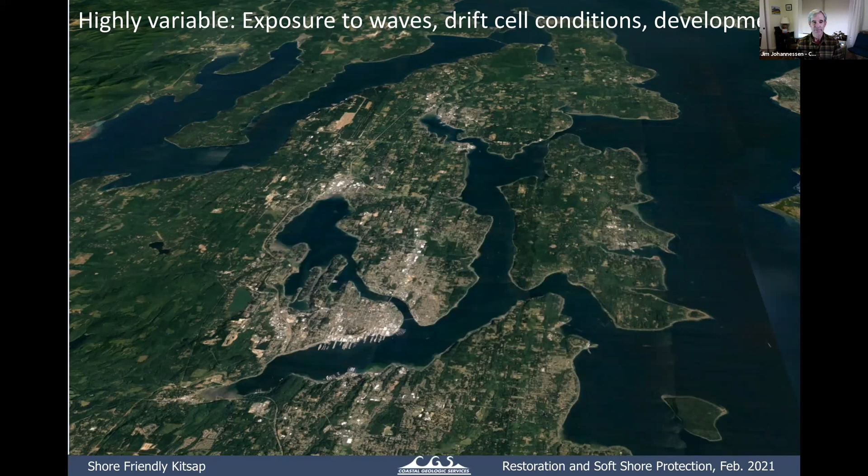And the more armor, which is bulkheads and seawalls, the less sediment is getting into the system and moving in the system, and you're more likely to have beach erosion. It's sort of a negative set of consequences the more highly developed the beach gets. And you can just look at the gray areas on the map versus the green areas, and you can see that from the airplanes and the satellites.

Like I said, Foulweather Bluff, high bluffs, erosional feeder bluffs. And then right next door, we've got these natural lagoons and spits, developed spits, protected lands, urban lands. It's all around the county. So we have to think about how do we manage them.

Well, the folks who build the bulkheads, they know how they want us to manage them, and they make a good pitch. You can see how pleasant it is sitting on top of the rockery wall with a Polynesian looking dress and a drink in hand. Call the number, they come out, they'll tell you what you want to hear. So there's been years and years of bulkhead building, generations of that.

And the shore-friendly programs came out of the need to counter the status quo from the 50s and 60s and 70s. We've greatly degraded the shoreline as a population here. We've seen salmon numbers plummet, and all of us together are trying to restore salmon, trying to stop the loss. And it turns out that shoreline hardening, shore armor, contributes to lots of habitat loss and lots of direct and indirect impacts. So that's kind of why these shore-friendly projects and the regulations have become tighter.

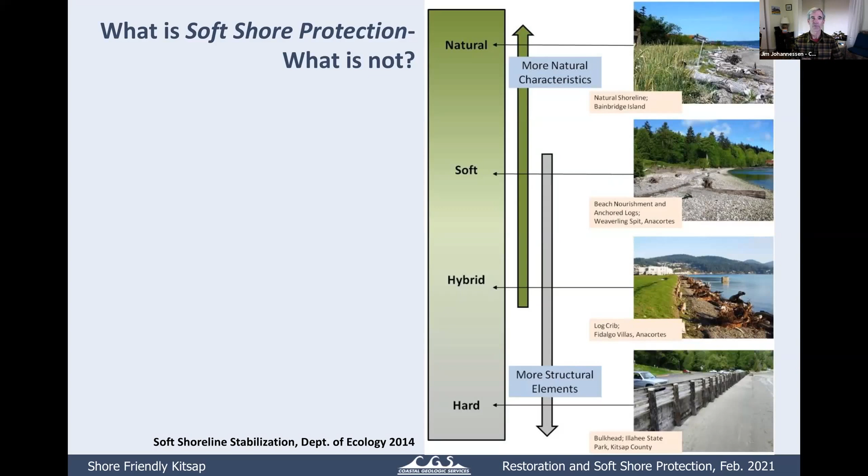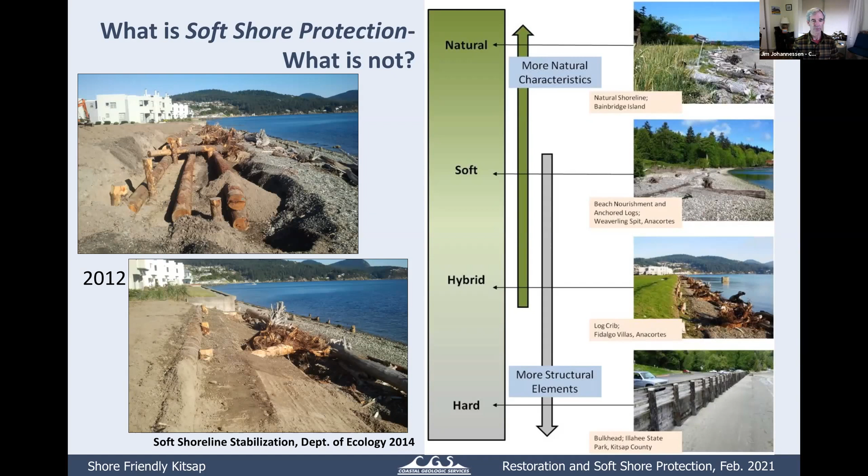The logs are firmly anchored, nothing's flexible there, but then they're filling in with gravel and cobble. So that's clearly not a soft shore protection structure, not a classic hard shore, so that's the hybrid. And there's a variety of ways that that's being done. Mostly permitted towards a hard shore structure, but maybe not as much mitigation needed.

I'm going to Hood Canal this Friday for a different enforcement site working for the federal government. So, there are more consequences, as we used to say to our kids, right, for breaking the rules these days.

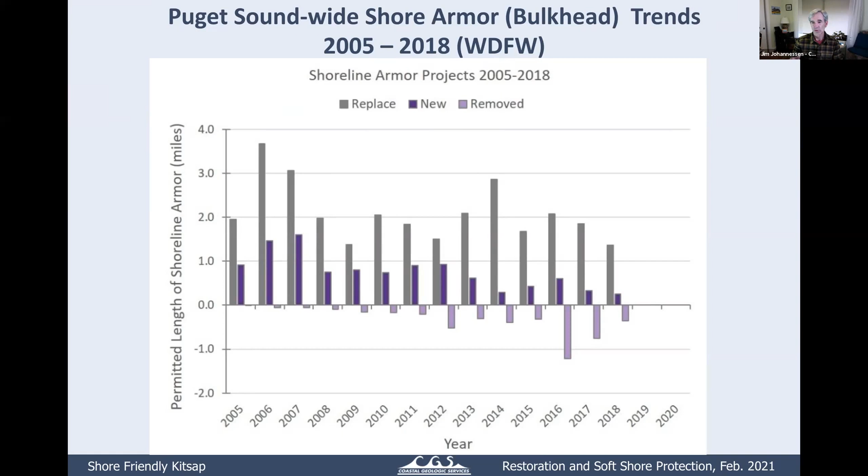I know we've had good numbers for grant-funded projects in 2019, 2020. I wasn't able to get the newest data. It's a bit of a lag from the state system. So there's been a lot of trend for bulkhead removal, and it's been going towards a net removal overall, even though this graph doesn't quite show that.

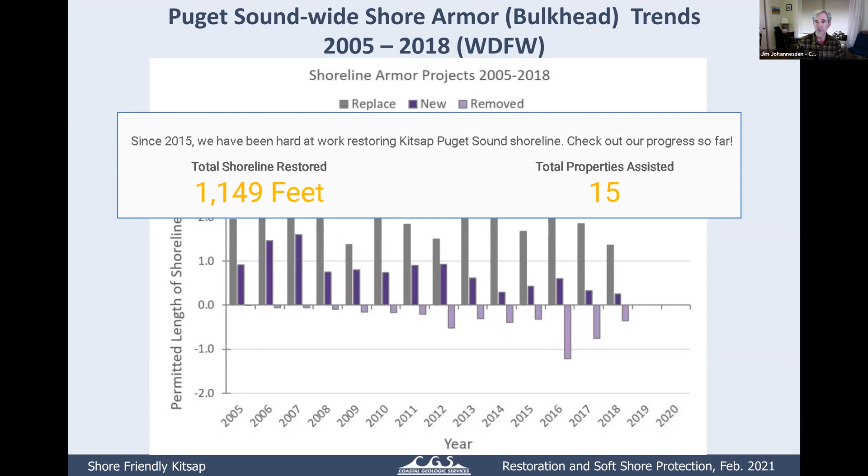In Kitsap County, this is from the Shore-Friendly Kitsap website, Christina and crew have been orchestrating and helping to assist a total of 15 projects with some grant funds and site visits to many more properties, but 15 have had some form of removals of armor for over 1,100 feet of shoreline. And you could talk to Christina about more opportunities there.

So the Marine Shoreline Design Guidelines, I introduced this quickly a week ago, MSDG for those of us in the know. It goes through how to understand these shores, what are the issues, how to figure out what the problems are for causing erosion. And then it goes through a variety of management techniques.

These are the basic management techniques, starting with full restoration. Bulkhead removal is one specific action, along with other structure removal. Then there are passive techniques, like vegetation management, staying away from problems, drainage management, avoiding clearing in the wrong places, and relocating homes or other structures back from an eroding shore or bluff.

Soft shore protection includes beach nourishment, which means adding material to the beach. Think of it simply as nourishing the beach with sediment as the food. Gravel is the common protein and carbohydrate, and you throw in a little sand and vegetation for the beach to grow in. Large wood is also used, but at a more restricted set of sites.

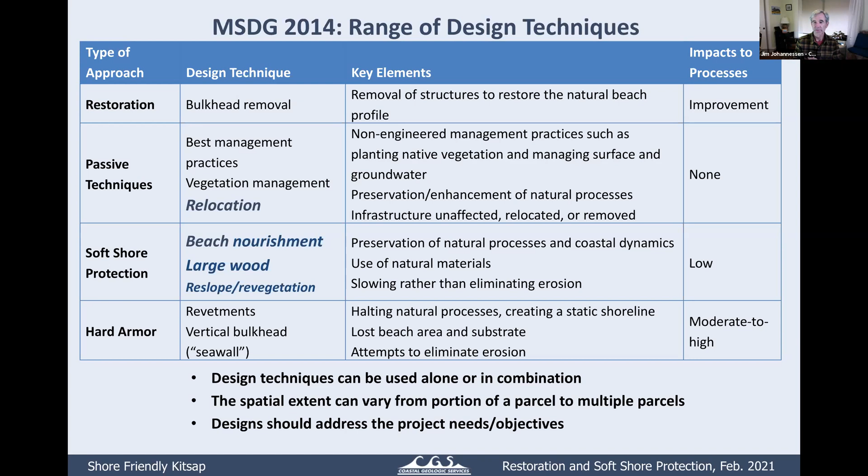The various soft shore techniques and vegetation passive techniques can be used together or in combination. The spatial extent varies—it can be one parcel or many. You can have more options with longer shoreline stretches, particularly for beach nourishment. The designs need to address site-specific needs, characteristics, and objectives.

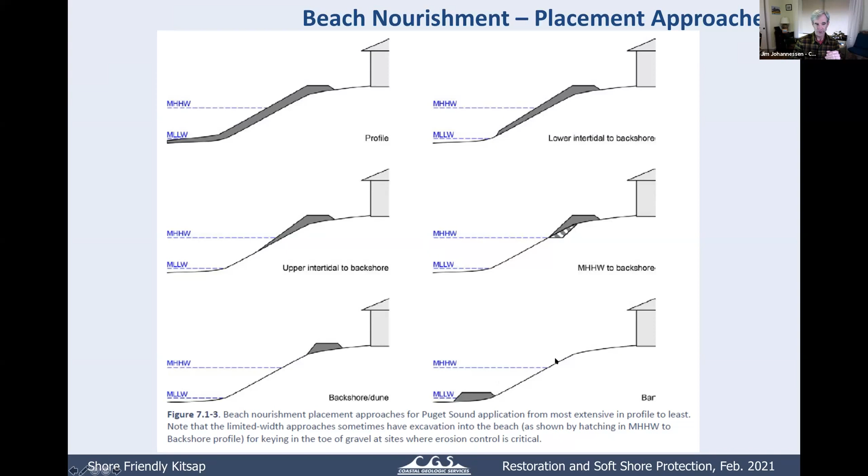Lower to moderate wave energy sites are more favorable than high energy. But again, if the waves are coming head on, then the high energy sites can work quite well. Like a pocket beach is usually oriented towards the largest wave between a couple of headlands. We don't want to do this at high erosional rates or places where houses are very close and the risk is high.

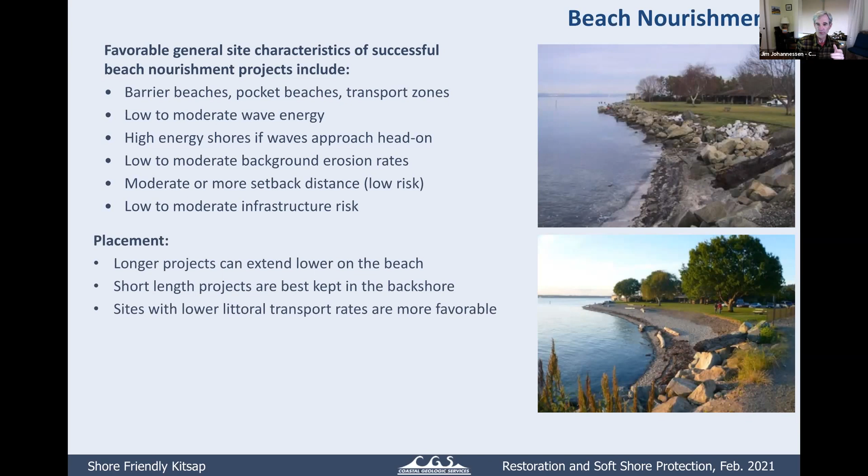It's not as permanent as a bulkhead, so we have to be upfront about that. In terms of placement, longer projects can extend lower on the beach, and you've got more options with longer projects; more places are suitable. So again, short projects are best kept up high. Sites with lower littoral or net shore drift rates are more favorable.

And moving on to large wood, or drift logs, call it what you want. These are examples of built projects, again, from the design guidelines. I'll show you the upper two projects in more detail. The one on the left had large anchored logs parallel to shore. The one on the right had some logs put up at angles to catch other wood. This is in a high drift wood area.

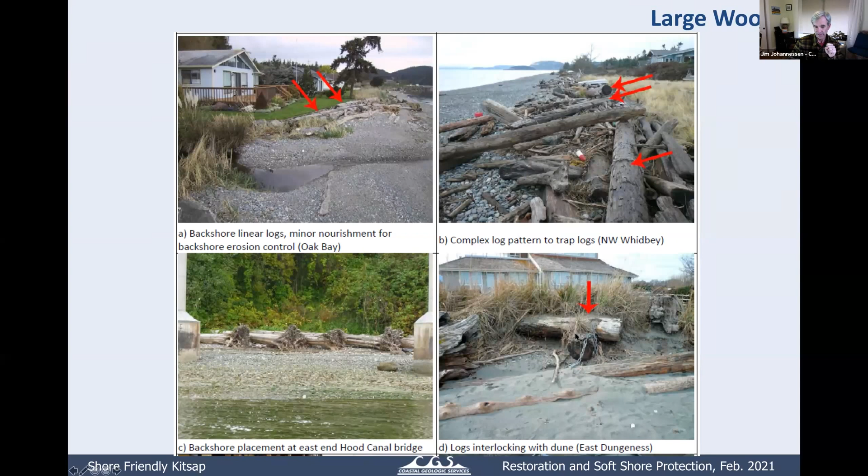This one is under the Hood Canal Bridge, done by others, and this is a pretty brute force approach with large cedar anchored. Then here's another one on the right with some interlocking logs within a larger berm. When the logs are buried, they tend to rot a little faster - that's the only problem with that approach. So selection of wood is important too.

So favorable sites for large wood would be, again, the no-bank sites, the barrier beaches, pocket beaches, and then transport zones, which are the more neutral shorelines with slow erosion, low to moderate background erosion rates and wave energy. Again, not the highest risk sites - the design guidelines has a way to look through and assess risk through some different characteristics. And then you need to have a little bit of room. That's why the no-bank sites are best.

For placement, usually placed higher on the beach where natural logs occur. There's been a couple projects that other folks have done where they're anchored quite low on the beach, and they haven't done quite as well. This one on the right, I haven't really studied this much - I believe this is in Kitsap Memorial Park, down where you guys are. I don't know that there's much data on that. But if it's placed too low, it can get scour underneath the logs in particular, and the anchors take a lot of force in the chains and whatever else you're using.

So really, the design guidelines recommend they're not installed below the high tide line. There's an example right there that's different.

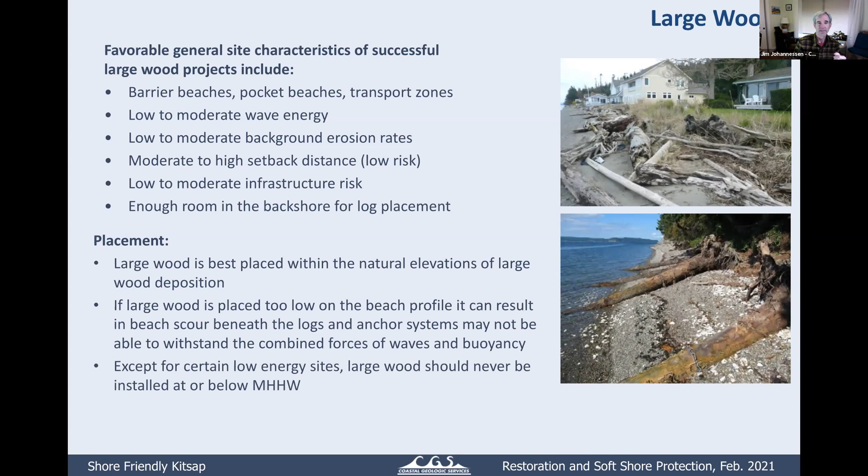I'm not going to run through this whole table, but there's a table and a flow chart in the design guidelines, and they get at - beach nourishment, large wood, relocation, hard armor, reslope reveg, the bank revegetation - those are the abbreviations.

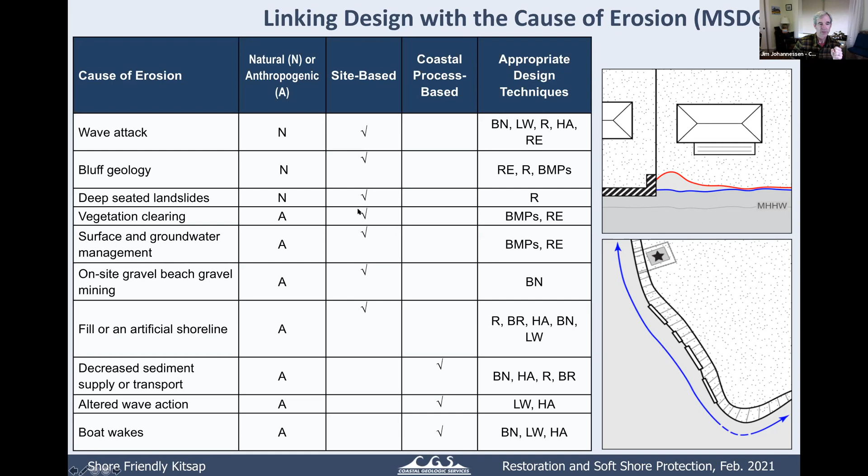So these are the tools out there, and I'm going to keep moving. The design guidelines also has a large case study appendix, so you've got 25 case studies, and maybe one of them is much like your place. It's all online, and you'll get the link from Angie and Christina.

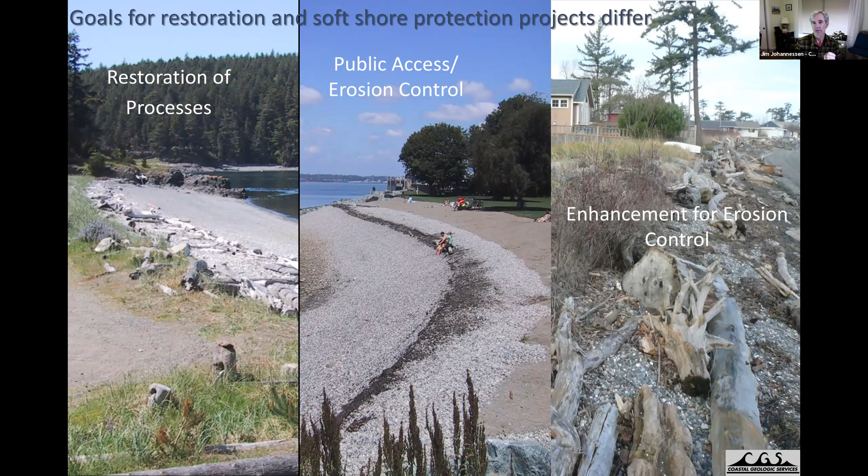So goals for projects differ. We might have a pure restoration project on the left, an enhancement, habitat and recreation project in the middle, or a single family erosion control on the right using soft shore. So the goals will help dictate the approaches and the needs. So a few bulkhead removal case studies and more restoration-oriented projects that I've designed and my team has designed over the years.

This is the Powel site down on Bainbridge Island, on Bainbridge Island, Port Madison, Bainbridge Island. Of course, in this area here, so it's a point that faces down into Port Madison, relatively low energy. The drift cell ends here. The sediment transport along the beach kind of peters out in this area.

Bainbridge Island Land Trust got some grants 10 years ago, 12 years ago, for 1,500 feet of shore on this large property. Most of it was armored many, many decades ago. We did the engineering and design and construction oversight. We had Northwest Ecological Services doing a revegetation plan.

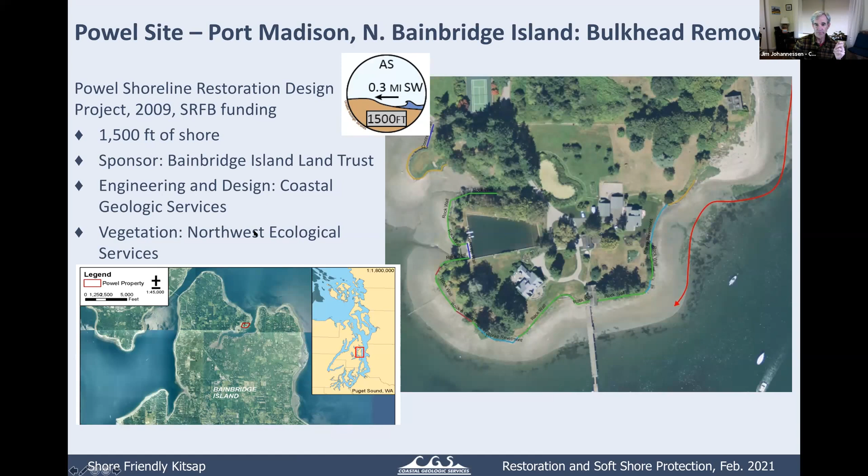Some of the before on the left, we had falling down creosoted walls, creosoted wood, rock walls. We had concrete mortar walls. So we had access by barge and loading out all the debris by barge. We had a cultural site in this area, a big shell midden that the tribes were concerned not be damaged. And then we removed the armor. We didn't do a whole lot of bank regrading. We transplanted the pickleweed, the salt marsh, and then cleared out invasives and started to plant.

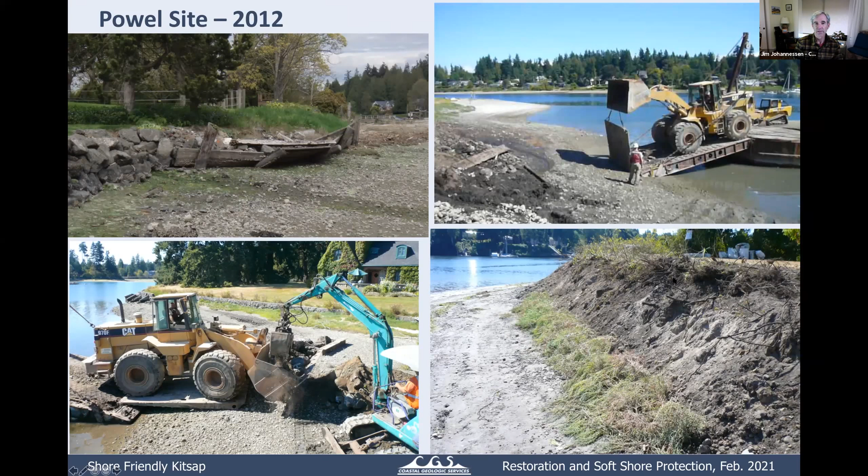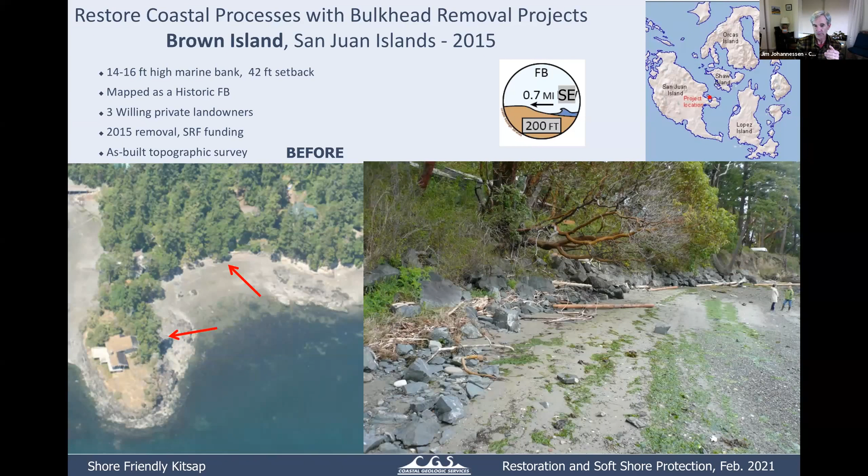It was here, but we had a fairly small wave energy, slow erosion rate. And the owner here was very happy to try to naturalize the shore. She's very interested in salmon restoration and getting more room to walk on the beach as well. This makes more room for forage fish to spawn on these upper beaches, makes room for vegetation to regrow. The litter falls, the bugs fall, the adult salmon actually eat large insects coming out of trees. We know because we've looked in their stomachs.

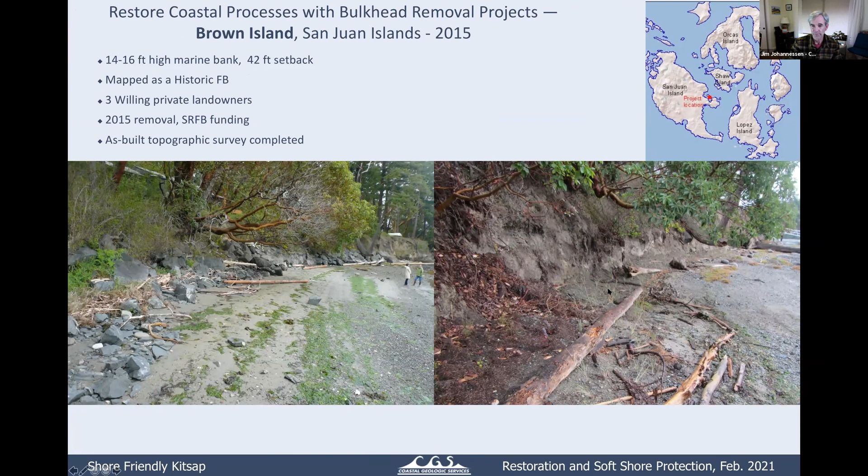So this is the before on the left, immediately after on the right. So it still looks a little raw, and then the dune grass plantings just popped in the ground the day before this photo was taken. Come back a couple years later, and the backshore vegetation has all come in on its own. The dune grass has spread naturally and through the planting. No extra bank erosion. And here's the owner once again explaining things to some other folks.

Here's another before from San Juan County, on Orcas Island. This site has a little more fetch, but only 1 mile from the northeast and east. It's a no appreciable drift shoreline, a little pocket beach surrounded by bedrock, 110 feet long. There's a dripping, oily, creosoted wood wall up here, with some fill behind it and a rock armored slope extending out over the beautiful beach.

The owners changed hands, and the new, younger owners had some interest in restoration. They started cleaning out some of the creosote from the dock and upgrading that, and they wanted to restore this area as well and free up some of the beach.

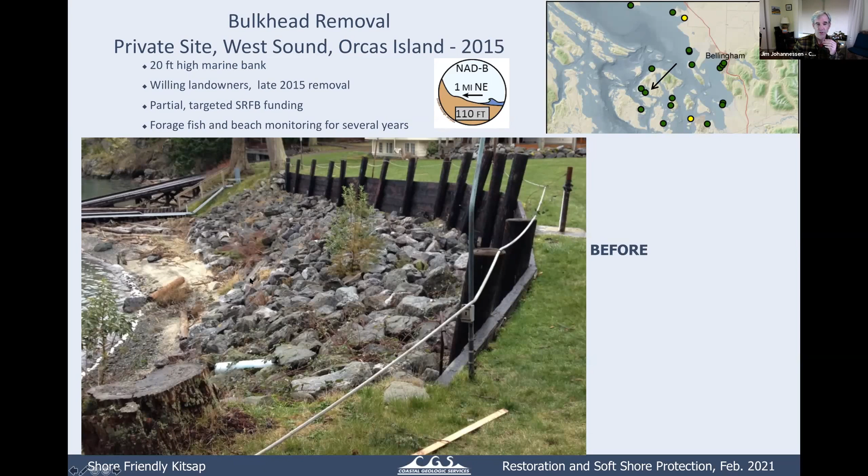So sure enough, we pulled that wall out. The contractor removed all the rock, and we actually graded it back a little bit to get ahead of the erosion that sea level rise is going to cause, as well as the catch-up erosion that would have occurred after it being bulkheaded for 60 years with no change.

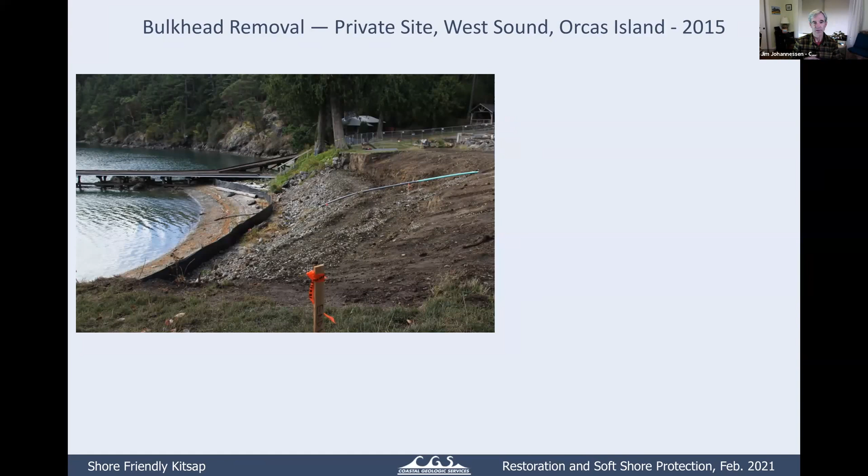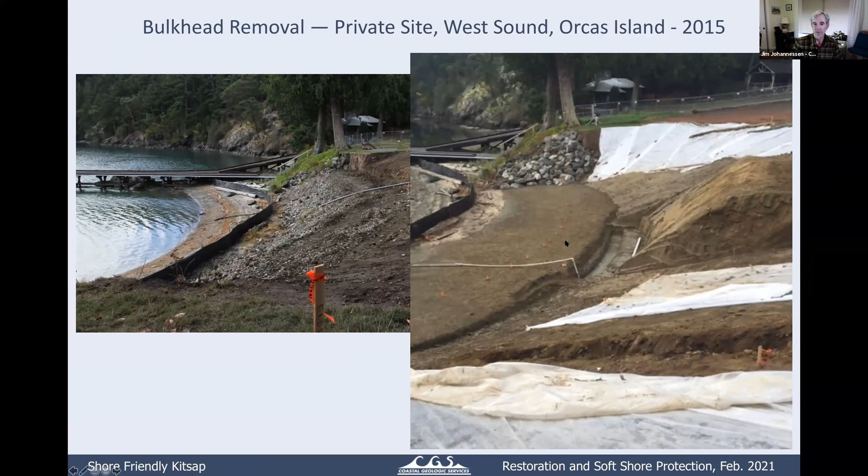You can see it was actually benched back in sections. A little bit of drainage control had to go back in that was already there before we came. Some rock was moved to protect these giant cedars, and we're getting a wider, higher beach here. That's the finished product.

Dune grass planting and other native vegetation were just going in in 2016, with new steps set further back. The owners have been very happy, and there's been forage fish spawning occurring here after the fact, confirmed with some monitoring.

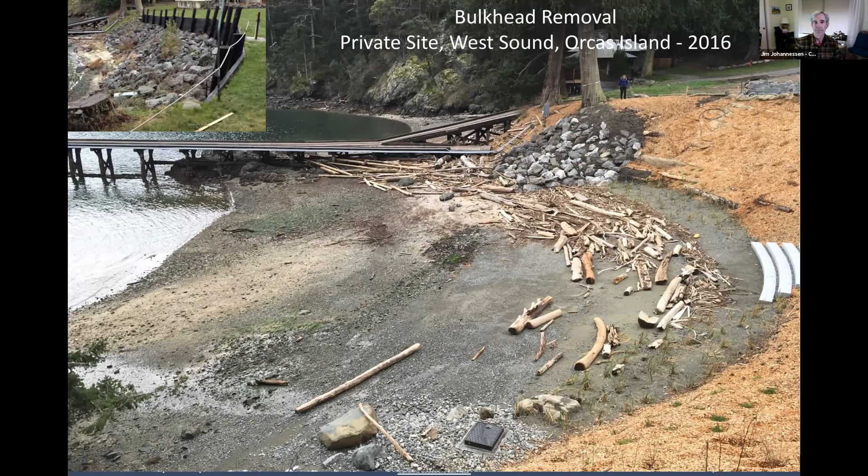So that's a single family project—a little bit larger, but still a singly owned parcel. They actually took the house down and built a new one further back as well.

Here's a small site way down in Mason County, Arcadia Point. This is an older house, probably from the 40s or 50s. They had a private little boat basin, which was a really odd spot—full of water, as you can see, because the beach came up on its own around the concrete walls.

This is a known fish trap. The tide would come in, salmon would go in there perhaps, the tide would go out, it would turn into a warm pool, and the fish would die. So when the Squaxin Island tribe bought this, they wanted that thing gone.

It was not usable—there's a spit and a bar in here. They were hoping to take this bulkhead out, but then it was determined through our investigation that there's a septic drain field right here, so that couldn't be taken out at the time.

However, the private boat ramp, they had no use for it. That was removed because there's a much larger, much better public boat ramp right here, and the tribe actually does use that—they always have.

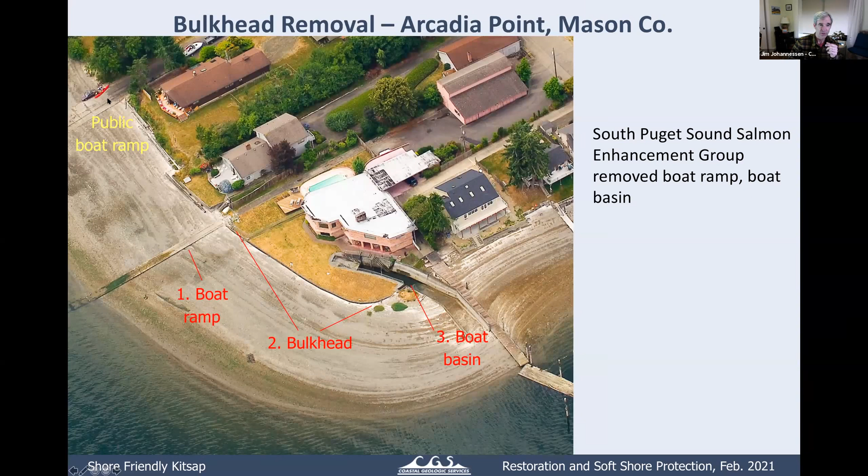So the before shows that fish trap basin to nowhere. After removal, we filled that in with the concrete to save some money, then filled it in with soil and put a little gravel sand mix over the top. Pretty straightforward project.

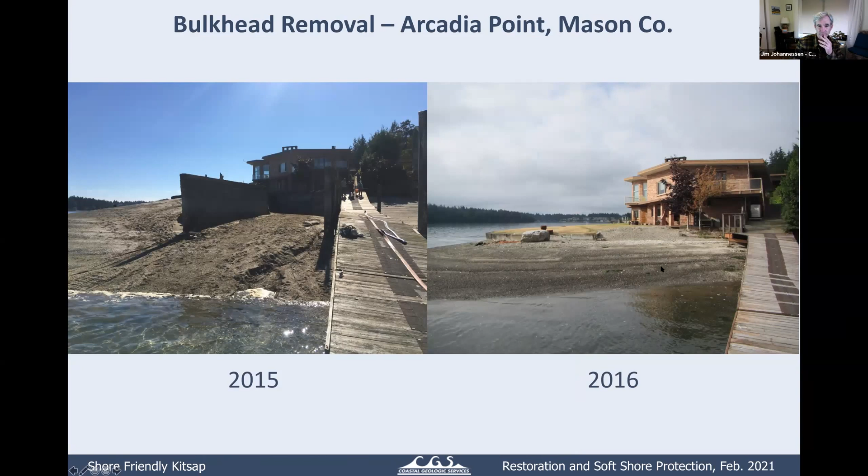Moving on to another one—this is a private community up in San Juan County on Blakely Island, in eastern San Juan County. It's got about a 10-mile fetch from the northeast, which is sometimes the big breeze from Canada, so it can get pummeled at times.

When I presented it to the community, an old guy spoke up and said, well, how much gravel do you want to add out there? We said about 1,800 cubic yards, about 18 dump truck loads. He said, that's about what I hauled off that beach in the 1960s—I was driving truck, hauling gravel to the airfield, and I took it out. He was just driving truck, just following orders.

So gravel mining was a big problem around here until fairly recently. A lot of our beaches were mined for construction and all kinds of things. We've got pictures of horse-drawn carts carrying gravel and sand off of beaches around here. It's a worldwide problem, and it's underappreciated.

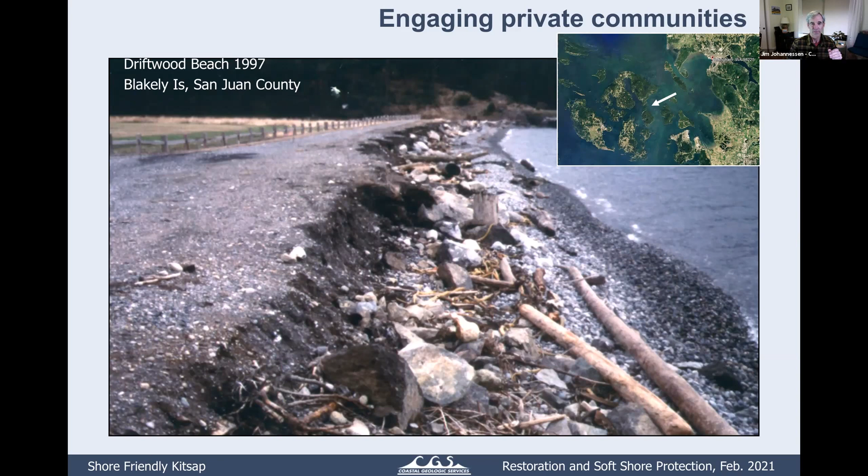So we brought in gravel and a lesser amount of sand. We pulled that road back and out. We tried to avoid the high power cable that was feeding all of San Juan County, or at least half of it, with energy here from Bonneville Dam. When we asked the provider to bury the cable because the beach had eroded some, the service provider said no, but you don't want to hit it, especially with your steel barge. So we managed to avoid that.

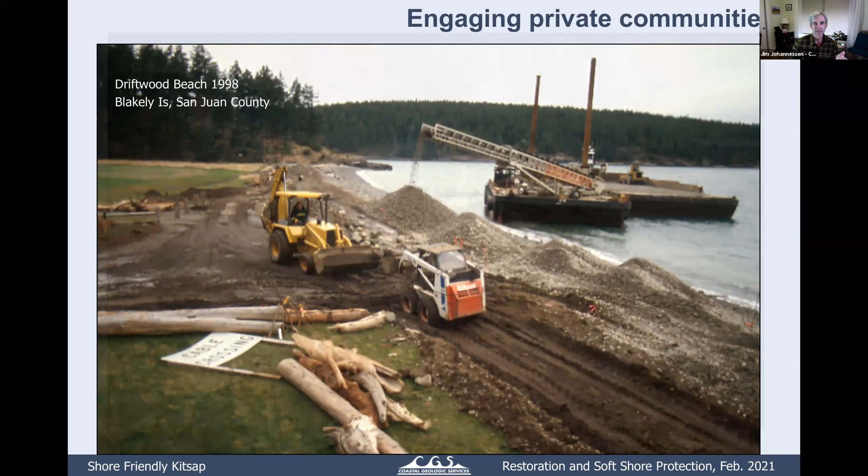So that's during construction. Obviously, this is 1998. Two years later, we had, actually in early 99, we were finishing it. Yeah, that should have been 1999, that last one.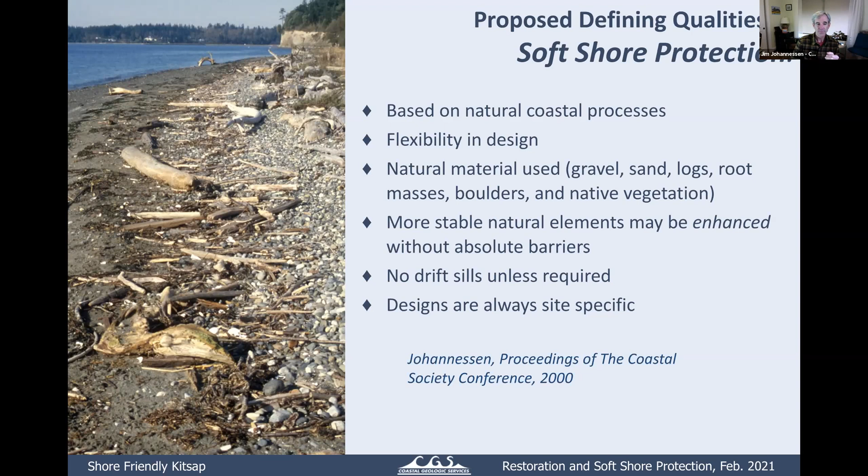Here's a private example of a group of homeowners. Like I said, a longer shoreline makes a better, more flexible, versatile longevity as well. So this was about a dozen houses and cabins on North Samish Island here. It's got actually a fairly large fetch from the Strait of Georgia that makes its way inside here in the Bellingham Bay for 10 miles.

So that when the north winds blow, this site gets hit really hard. You can see the bulkheads were falling down and the overwash was right up by the houses. We considered moving some of these houses back, but there was nowhere to go. There's a bank behind them.

And in fact, there had been a landslide that touched somebody's back door at one point years ago. So no options to move back. These blocks were just rearranged in a line temporarily. They didn't fall down in a straight line. But this is 98. Again, it was a bad year.

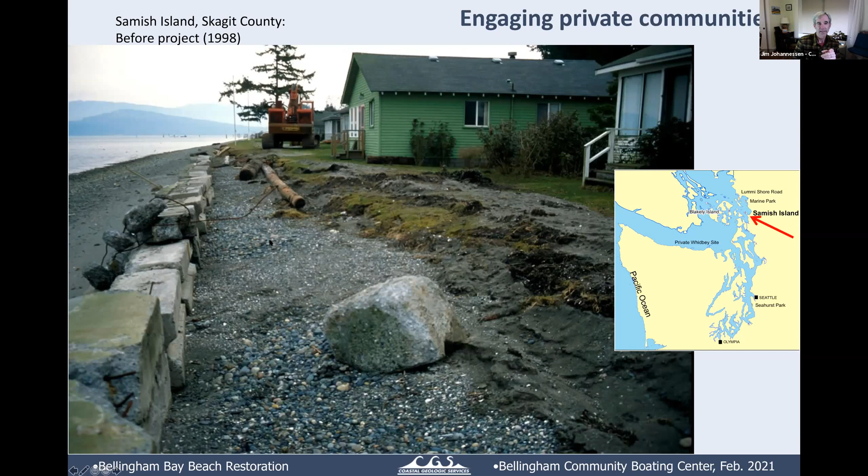This is a highly impacted drift cell. So the drift cell is from west to east. And where the feeder bluffs are on the west, it's about 80% armored and bulkheaded. So the big sediment source, there's no river here. I mean, there's Samish River, but it spits out silt and clay, and it doesn't come to this beach so much. The bluffs are all armored, so the sediment is not getting down the beach.

And what little natural sediment there is blocked by some of these big groins and fill areas. The project site is at the beginning of this large spit, which is usually, if a spit's going to erode, it's going to erode first and most at the base or the beginning, the neck.

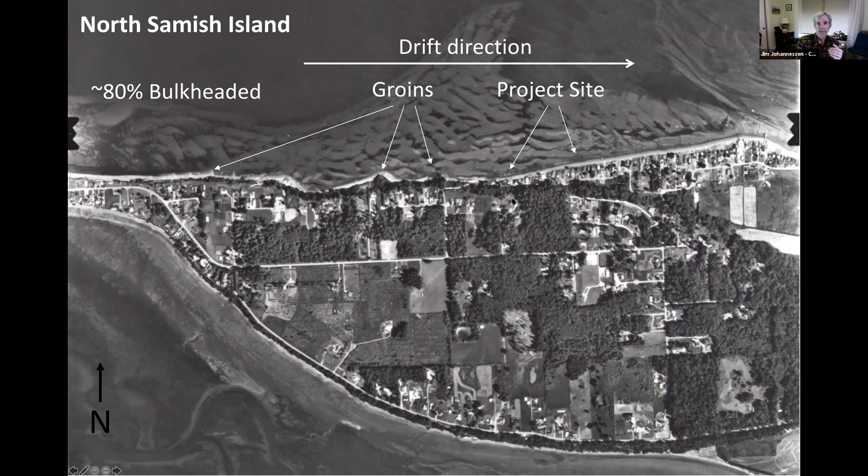So, like I said, here's these houses. The northerly storms were pounding into the walls, putting a lot of water over the top, and some of the walls are starting to collapse. So these people had been there for 3 generations.

They said, we really don't want to rebuild these bulkheads. We want you to come up with something more natural, because we remember the beach as kids. It used to be a lot higher, a lot nicer, a lot sandier, and we want to go back to that as much as possible.

This was a surf smelt spawning beach as well, so there's some constraints on what we could do. They spawned right around where these blocks are stacked, so we're looking to augment the beach if possible and not just build big walls. So we brought in lots of gravel, and we put a very fine gravel layer on top. This was brought in by barge.

This boy on the bulkhead has graduated college a few years ago, so we know it's quite a while back. We put a coarser gravel here, we graded it, put a finer gravel on top, and a little bit of sand in the back shore. This is sort of the end of the project.

And this is a few years after nourishment. The dune grass is starting to come in. That's that same green house in the middle that you saw, the broken down wall. Big wide beach, there's been zero maintenance since it went in. Surf smelt spawning has recommenced.

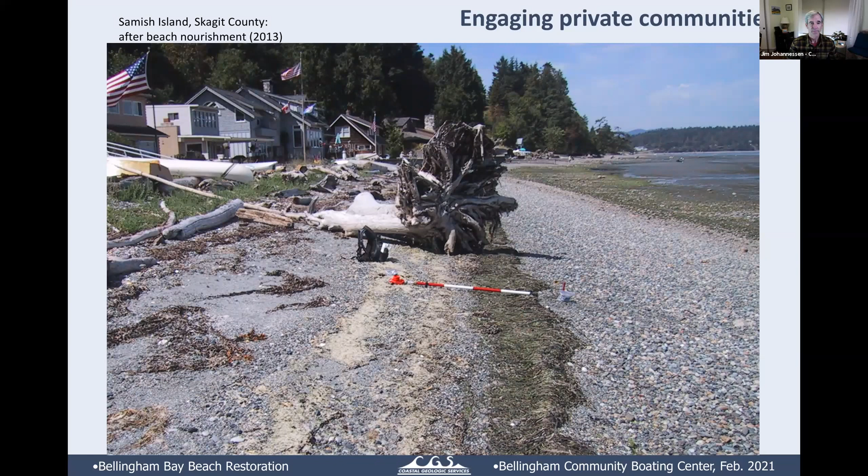And by 2013, you can see a fine summer day, the vegetation's come in, more wood has come on its own. There is one drift sill on the far end of this project to slow down littoral transport, a rock structure. 2013, yeah, it's kind of a repeat.

Okay, here's a Kitsap County project. This was one that got a little bit of assistance through the Shore Friendly program. And this was a frosty day, that's why it looks so gray, a couple winters ago. And you can see maybe in the middle, the concrete bulkhead is starting to fall down. It's cracked in several places. It's leaning out. There's more cracks along the way.

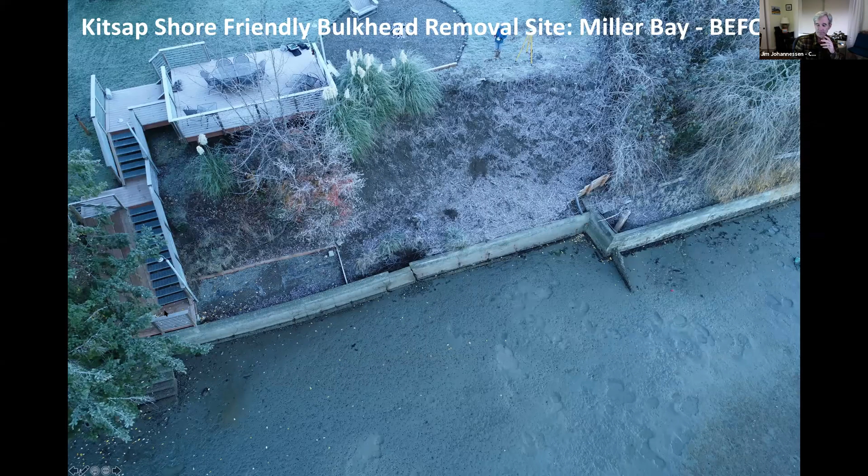One of the constraints was this little deck fairly close. But all of this structure was taken out. And there was a little bit of structure repaired and replaced near this giant tree and near the stairway. Here's the on the ground before pictures. So you can see the walls literally just about ready to fall down, and the erosion is getting behind it.

And then they had this nasty Japanese knotweed, highly invasive exotic species they were eager to get rid of. So part of the project actually scraped all that out, took the roots and soil away. And here's the beginning of the project. So they got a little bit of financial assistance through the mini grant to do part of this project. And we can see the wall starting to come down and be removed. See, the beach was pretty mucky at this point.

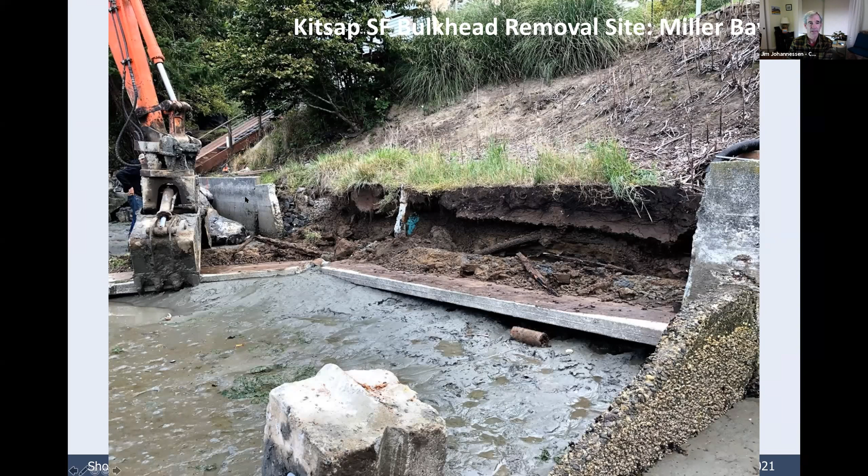It's got an articulated bucket so we could move around, get everything out of there. Other angle is when we're starting to get an anchored log in there. It's got some anchors buried down below grade. You can see we pulled back some feet here, and then this wall is coming out next.

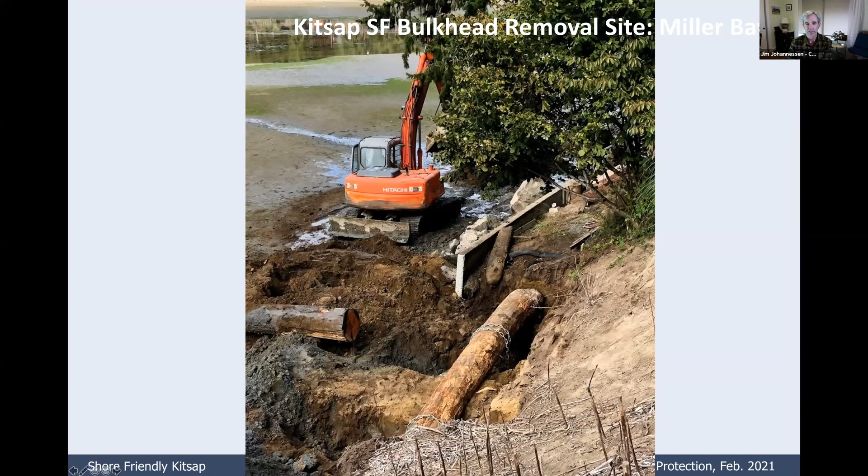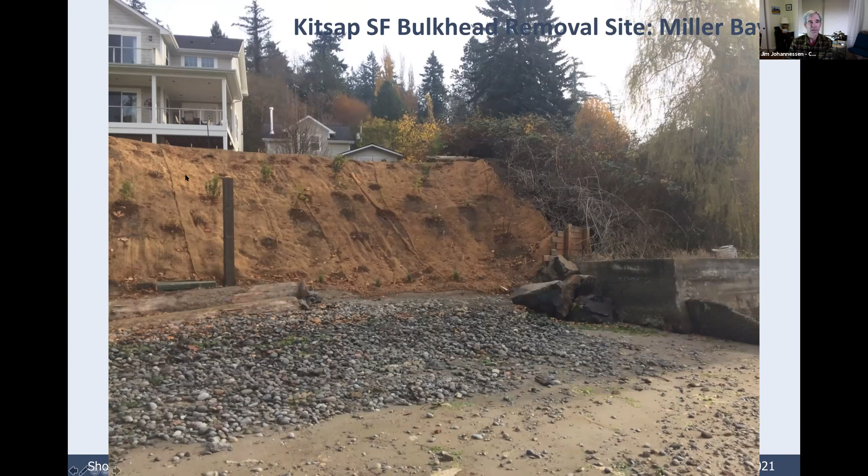So that's all been removed. There's two logs anchored in and some coarse gravel brought down. And then the exotic species removed and some jute fabric, and planting has just occurred. This is right after the project. And then the house up here, the deck is just off on that left edge as well. And same project here. I guess this is right before planting.

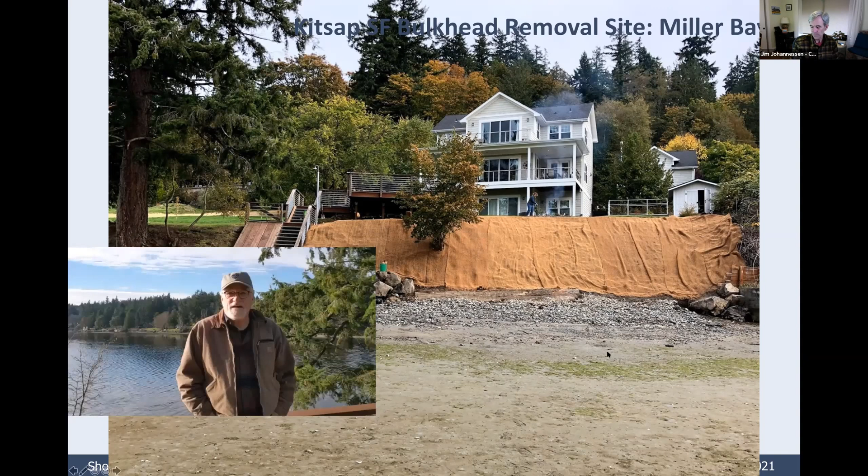Let's see if this video works of one of the owners. You might have to turn your volume up. Volume up. Let me start that over again. We couldn't get the volume any louder. Volume up. Okay, hopefully folks can hear that. I've only got one more video like that. Angie, step in if you just couldn't get it loud enough. It was pretty quiet. Yeah, I caught most of it, I think. Okay, well, maybe we'll try the other.

So just another view here. Kayaking was really big for these folks. So they've got a nice little kayak rack in there, and the beach is naturalizing. This is just a few weeks ago this photo was taken, and the dune grass is there, just a little bit of it. This deck was a bit of a constraint. It would be nice if we were able to move that back, but anyway, we worked with it.

So let me try this last video like this again. Okay. Oh.

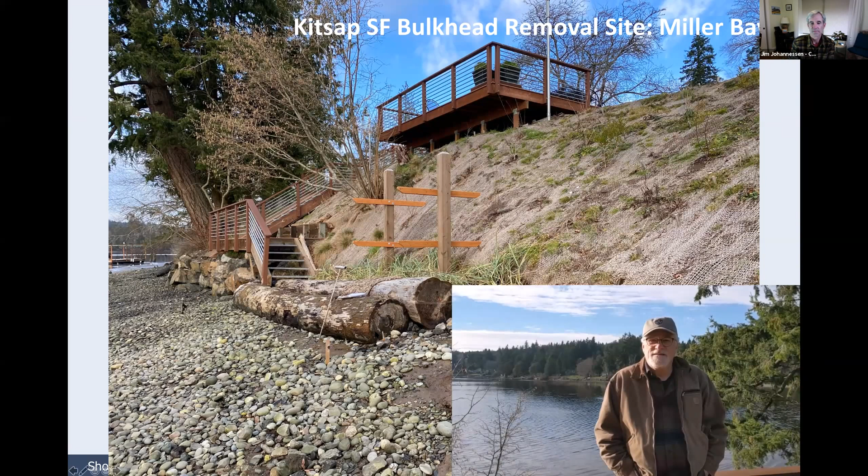Hey, Jim, do you mind if I interject just real quick? Sure. There were just a couple people, they couldn't quite hear the costs in the video. They were hoping that they could hear that or you could summarize that for them. Is that okay? Yes, that last project, that one ended up being more expensive than the owner hoped for. I think he might have said. I couldn't even hear that playback this time because I'm keeping it down.

That project was really tough because you couldn't come in by water. It was too shallow. And it was hard to get down the bank, and it was a long haul from the hill to get all the way over there. So it was a lot of handling of material, really lousy access. I think his total costs for everything were around $70,000. Typically, these projects are more like $25,000 to $40,000 when the access is pretty good. So it's not cheap, but like I said, his was really expensive because of that.

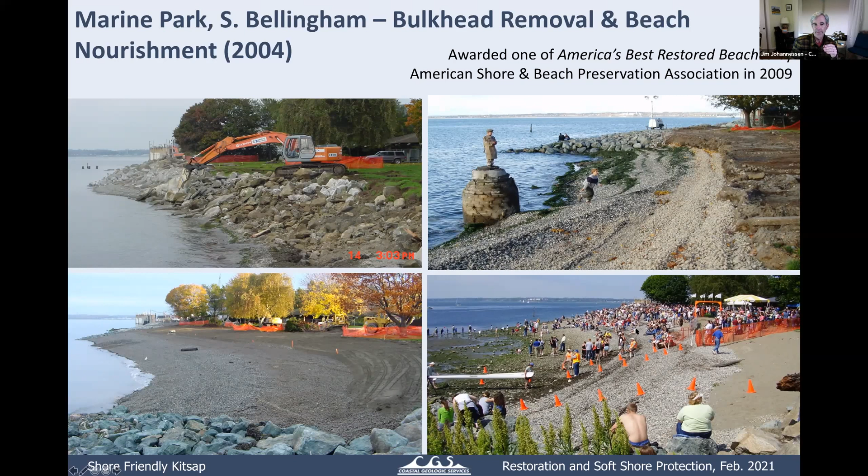This is partial beach nourishment partway through the project. We did build this rock drift sill to hold the material, and then we filled right up to the top of that drift sill in the lower left. And then the events could commence after that. That one won a national award.

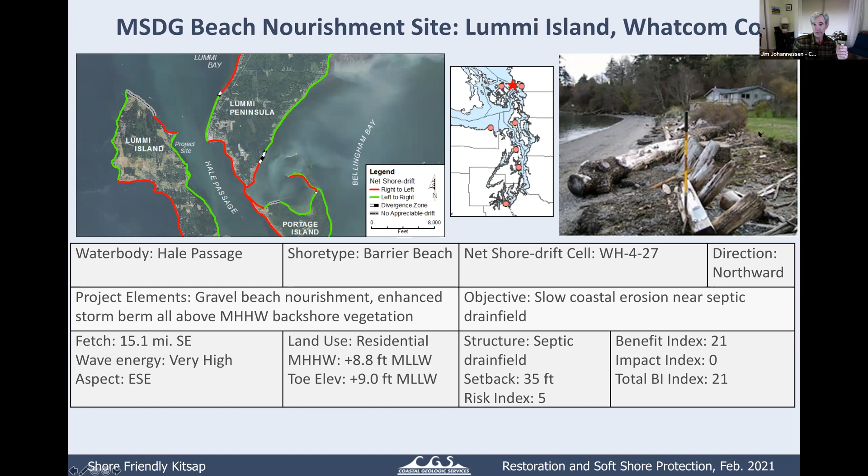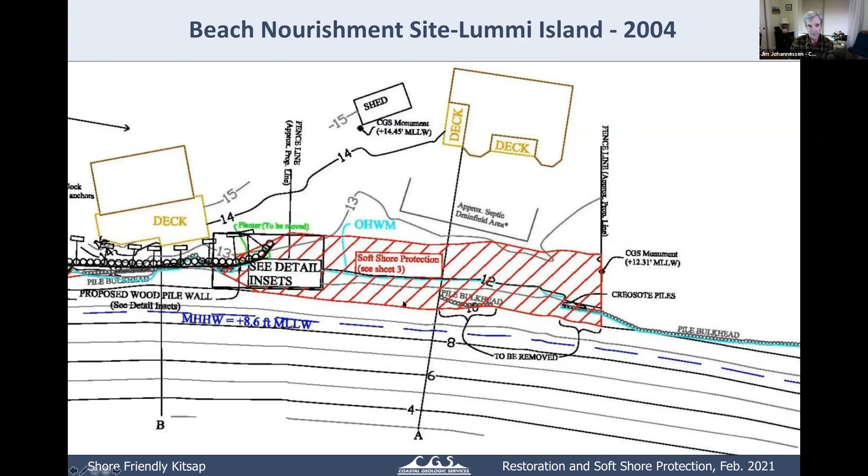Excuse me, here's the site plan: house, drain field. So we ended up taking the wall remnants out here and building a high backshore gravel berm, straddling the high water, straddling the erosional bank. And that's immediately after construction with the other almost college graduate here.

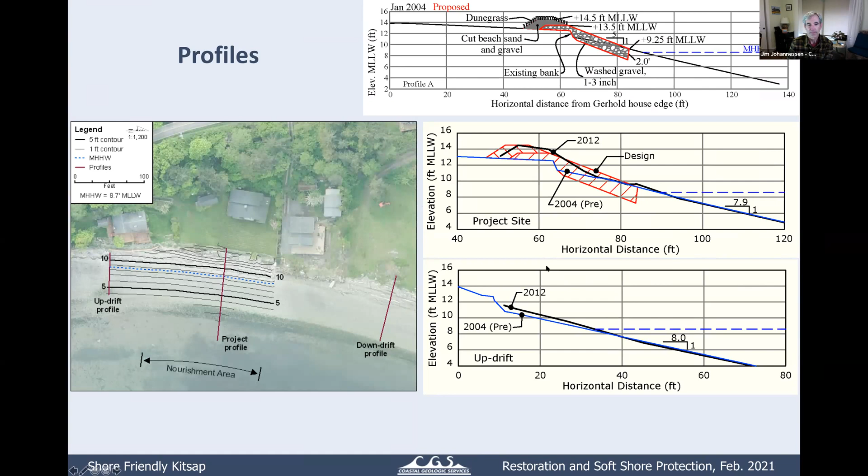And then a bunch of years later, we profiled it with a black line. So a little bit of gravel moved from there on up. So that's the thing, it moves onshore, like I said earlier. And that's the picture in year 9 after project installation. The owner hustling to try to get out of the photo, if I remember right.

Dune grass and Nootka rose, wild rose, are very hardy salt tolerant plants that do great in a backshore or on a lower bank. They can really help during the big high water events.

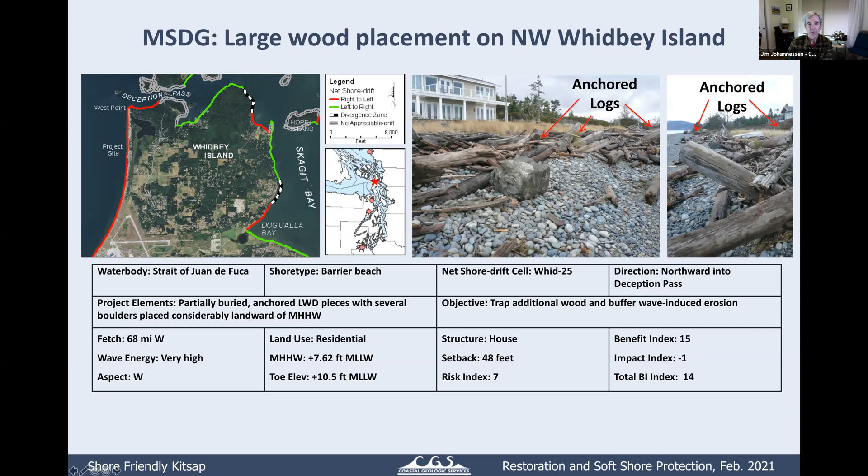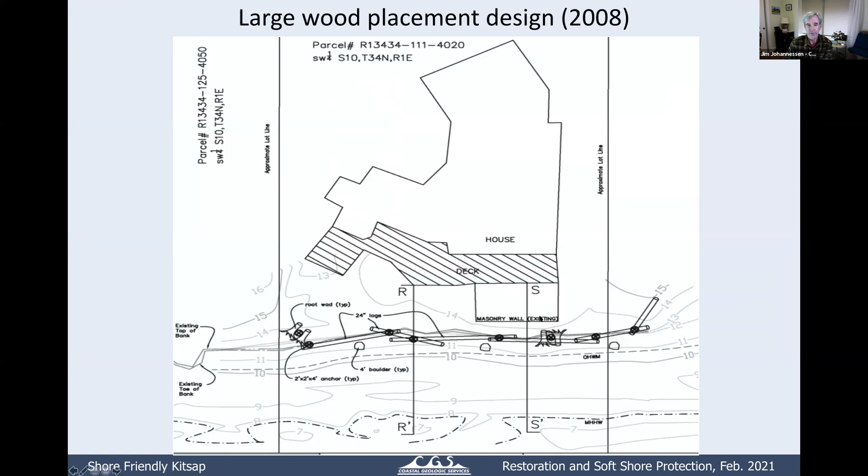So that's these logs up in here. So this one's performed very well. This is 2008. I haven't been there in a couple years now, but it's done very well. Logs out front, in front of their wall and their house. You can see chains on a few of these. This is year 3. This beach is very dynamic.

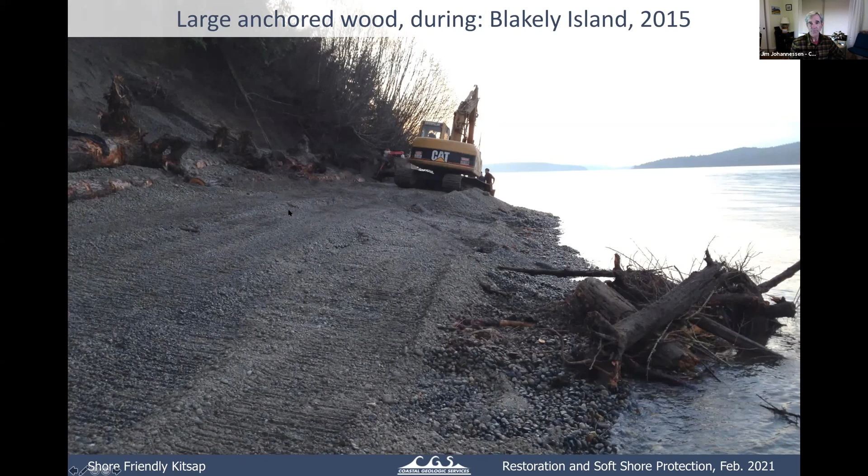This is just disturbance from the excavator. He's trying to grade it and get ready to go. He moved this material back up, and then he was done. So this is 2015 during the project, and 2015 immediately after the project.

I don't think I have a current photo for this one. It's kind of a relatively remote site.

Okay, finally, this is a single family residence, a small lot. This is in Oak Bay, south of Hadlock and Port Townsend, moderate wave energy. Facing to the east here, facing east.

This is a high water storm. And this was an illegal bulkhead, no permits. He actually tried to permit a concrete wall. He was denied, and he managed to go out and build this anyway.

There was an enforcement action by the state of Washington and Jefferson County, and he was told to remove the rock wall. If he wanted to design soft shore, he could maybe do that. The rock wall was also impinging on the mouth of this little tiny salmon stream that had some restoration projects in it. So all this rock was removed, and we did a soft shore.

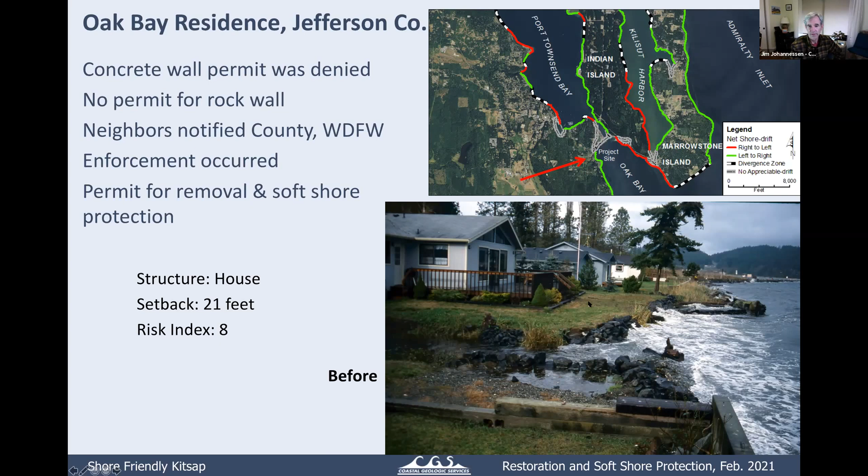No maintenance at all.

So in summary, given a little bit of room and having somewhat of a setback and not a high amount of disturbance, all these shores can get by without a real project. A lot of times developments happen closer.

The no bank sites are typically more viable than the high bank sites for soft shore protection, as I said. Beach nourishment can avoid traditional bulkheads in many cases. Sometimes it can allow for bulkhead removal and augment loss in sediment supply from other developments. Beach nourishment will work best at low wave energy sites or where the waves are hitting directly onto the shoreline.

The large logs are a little more limited, best used only high on the beach in areas with intermittent erosion, and often we use them with beach nourishment and vegetation.

The bank reslope and revegetation can work where the bluff toe erosion is very slow, and it's sometimes right after a slide where you're worried it's going to exacerbate problems. It can help control things where there's some risk to the house or other developments. And we can't forget about sea level rise, so we're trying to design everything at a little higher elevation, getting ready for the acceleration that everybody's predicting in sea level rise.

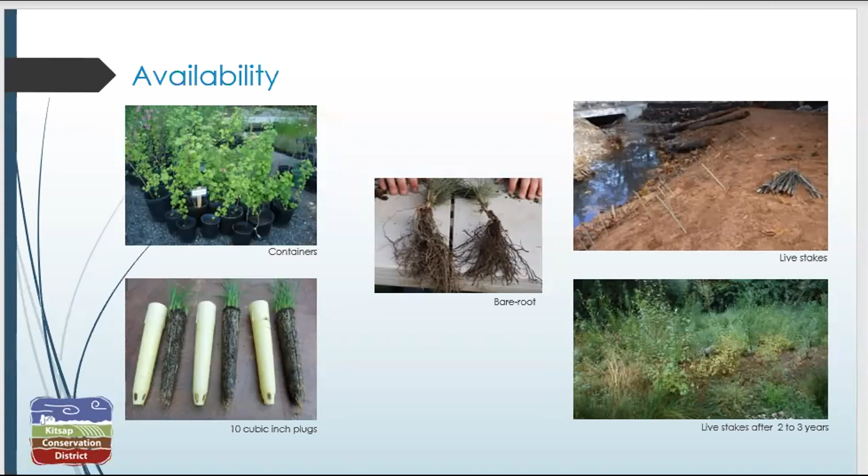Live stakes are certain species of plants that root easily, like willow and red twig dogwood, which can be planted as live stakes. They establish best in moist conditions and can be planted late fall through early spring when they're dormant and the soil is more wet. They're very inexpensive and available from native plant nurseries, or you can harvest them yourself. They do have a short shelf life and need to be covered with burlap, kept damp, and planted within about a week of receiving them.

When you're thinking about planting, it's good to identify your goals for your planting and recognize your opportunities. First, we're going to talk about the goal of decreasing erosion and stabilizing slopes.

Plant foliage intercepts precipitation before it hits the ground and causes erosion. Plants of varying heights—trees, shrubs, and ground covers—provide more opportunities to intercept precipitation and allow it to evaporate before it reaches the ground where it can cause erosion. Include lots of evergreens in your planting to intercept more precipitation in the winter, when most of our rainfall occurs.

Roots stabilize the slope, so if you plant a layered canopy, the roots will grow to different depths and stabilize the soil profile more effectively. Roots also remove water from the soil by carrying it upwards through the plant tissue. Any vegetation growing on the surface of the soil slows the velocity of runoff and traps sediment. You have to realize, though, that it takes time for plants to establish and be effective at preventing erosion, which is why you should always try to retain as much established native vegetation on your property as possible.

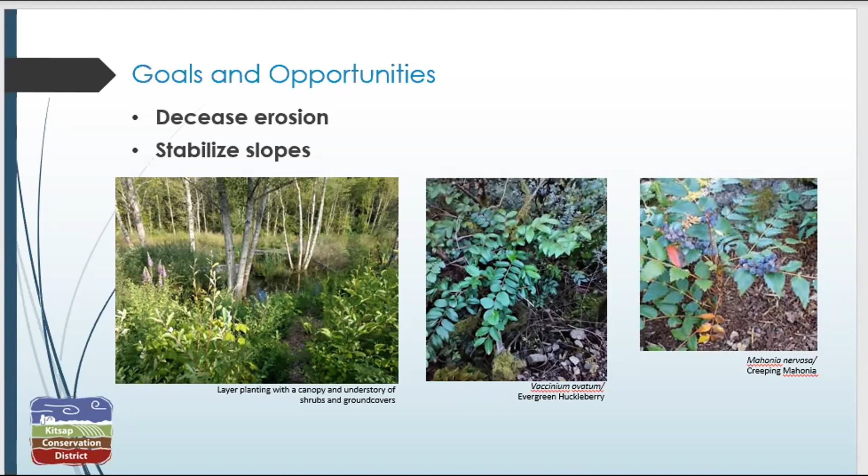Another goal when selecting plants for a shoreline is likely to be retaining or creating views. So as much as you can, keep healthy trees on your property, and if necessary, have them pruned by a certified arborist to open up a view. There are proper ways to prune trees that will increase your view without compromising the health of the tree. When choosing new plants and thinking about views, choose plants that can easily be pruned to maintain views, or choose those that have a more open growth habit to begin with. Shore pine is an excellent example of that.

When placing new plants, frame the view corridor with trees and taller shrubs on either side, and leave the view corridor open by planting it with lower growing shrubs, ground covers, or native grasses.

Vegetation is an important part of the near-shore ecosystem. It provides food, shelter, and shade. So when you're thinking about plants for your shoreline property, include plants that have blooms, berries, nuts, and seeds, and include plants that will provide shade along the shoreline. Shade is critical for spawning forage fish, as heat and direct sun will dry out and kill eggs. The same vegetation that shades the beach will also provide insects and detritus that drop into the water and become food for juvenile Chinook.

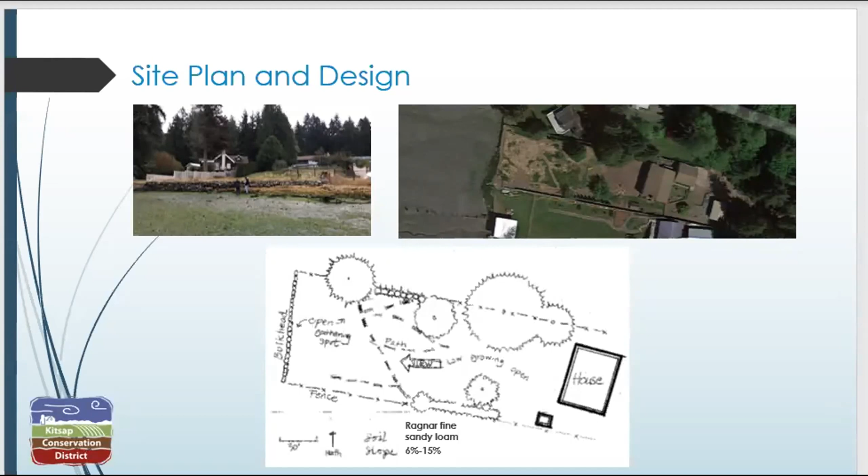This is the design that I did for this property. This is just a demo design, and some of these elements may not work here for one reason or another, because I didn't do a site visit, but I included them to illustrate as many options as I could. So my design goals for this property are to decrease erosion, increase infiltration where appropriate, retain views, direct foot traffic, have seasonal year-round interest, and improve habitat.

Beginning at the top of the slope near the house, I've included some features that could reduce runoff from the impervious surfaces of the house and the areas around it. These include a cistern that would collect roof runoff and could provide irrigation for future plantings.

On the south side of the house, where there's an area of concentrated foot traffic, I've indicated pervious pavement. Pervious pavement stands up to traffic while also allowing runoff to infiltrate. I've also included a rain garden that captures roof runoff in a shallow depression, again allowing it to infiltrate.

The feature down the middle of the property is a low-growing flowering lawn. This provides both a view corridor and access to the beach. I would try to keep it narrow and would recommend one of the eco lawn mixes that are available. A low-growing ground cover or a mix of grasses and other plants would also work. This planting should be evergreen to prevent exposed bare soil in the winter.

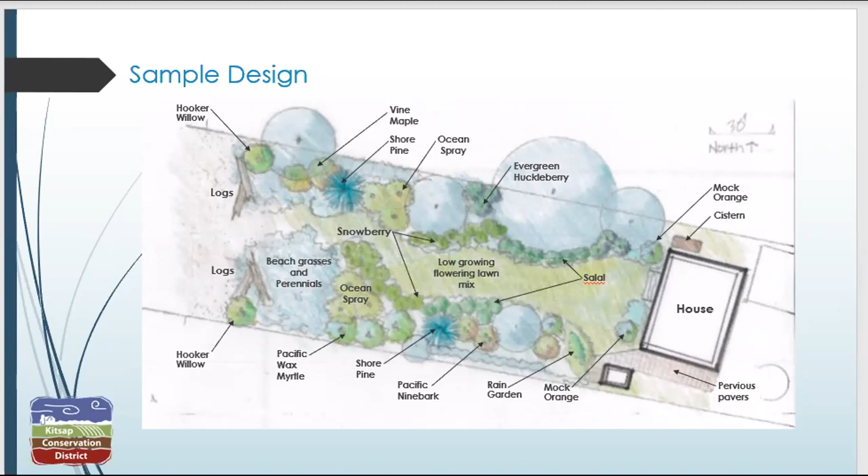So let's talk about planting. Before planting, remove existing weeds and competing vegetation as much as you can. This can make all the difference in the success of a new planting project.

The best times to plant are fall, when the soil is still warm and winter precipitation will provide irrigation. Early spring is also a good time to plant, and that's when bare root plants are available. The time you want to avoid planting, if possible, is summer, especially on a hot sunny day. If you do plant in summer, do so in the morning or evening when it's cloudy or rainy.

When you plant, dig your planting hole 1.5 to 2 times wider than the roots and about as deep as the roots. Roughen the sides of the planting hole to encourage the roots to grow beyond it. Untangle the roots or loosen them if they're growing in a circle. Place the plant at the same level as it was in the container and refill the planting hole with native soil. Very gently compact the soil to reduce air pockets around the roots.

Water deeply and let the soil settle. Add more water, add more soil if needed to cover any roots that may have been exposed. Place a thick layer of shredded wood chips around the plant, being careful not to bury the stem of the plant.

If you're planting on a slope, stagger the rows of plants. Create a shelf with a low berm around the bottom of the plant to help hold the water in the planting basin. These techniques will slow the flow of water down the slope and allow it to soak in around the roots of the new plant.

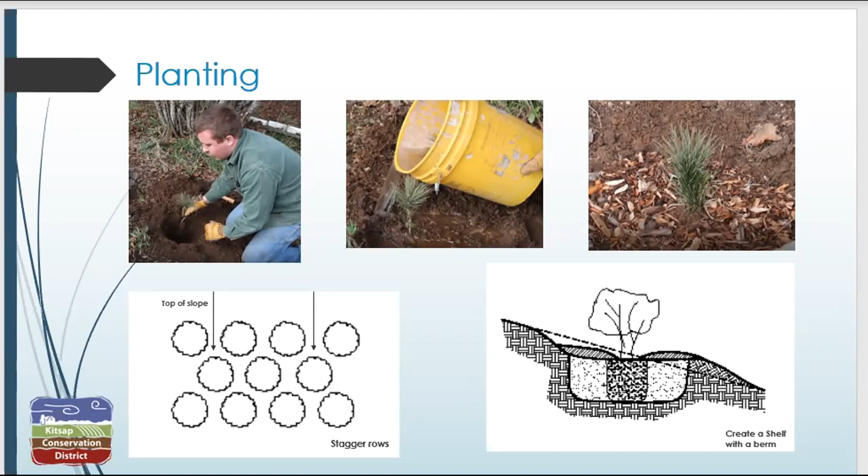One of the best things you can do for maintenance is to place shredded wood mulch around your newly planted trees and shrubs. This will help retain moisture and prevent weed growth. I would say 2 inches minimum, but 8 inches is not too much. So basically it's as much as you can get.

When you do see weeds, pull them as quickly as possible, especially the pesky ones like blackberry. Water carefully the first 1 to 3 summers after planting. The amount you water should decrease each year. Water only enough to moisten the root zone of the plant. It's okay if they dry out a little bit between waterings. And remember that you don't want to add water to steep slopes or at-risk slopes.

If you put in the effort in the first few years, it really pays off down the road. Make sure you plan for maintenance. If you can't keep up with it yourself, I would suggest you find someone who can help you with it. It's a really good investment. And keep in mind what they say about plants: the first year they sleep, the second year they creep, and the third year they leap. So you have to have some patience.

So in summary, observe your own property and similar properties to yours to see what's growing well. Do research from some reliable sources. Identify your goals for planting and consider your opportunities. Make a plan, take photographs, make a plant list, plan for maintenance, and enjoy your plants.